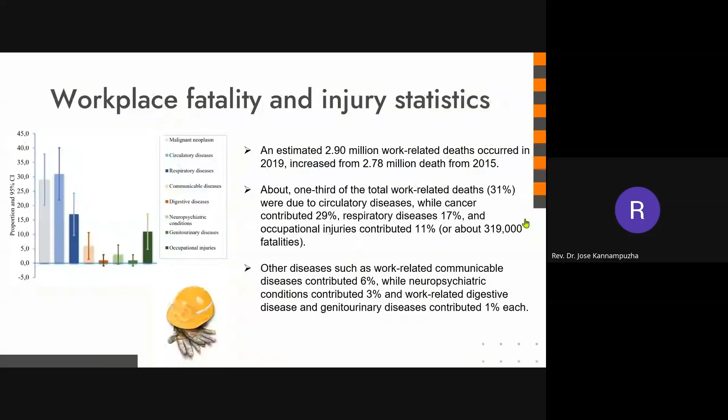Now there are other diseases such as work-related communicable diseases, which contributed 6%, and so on. Yeah, go to the next.

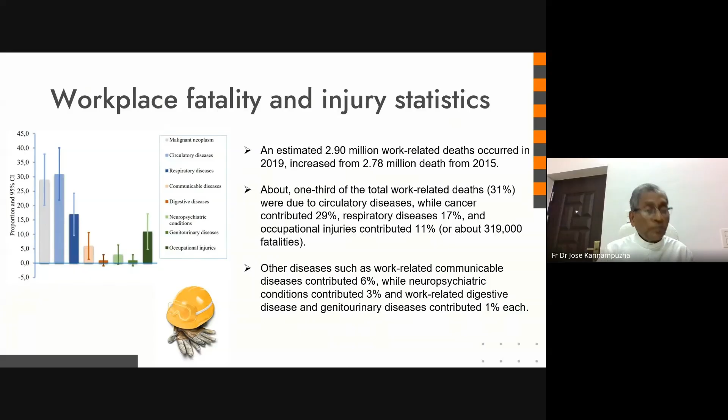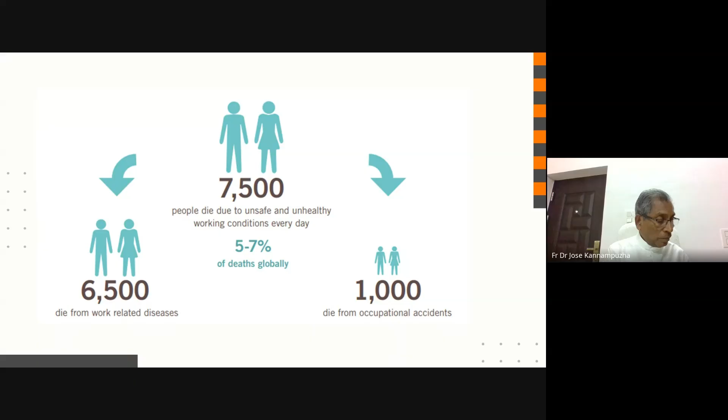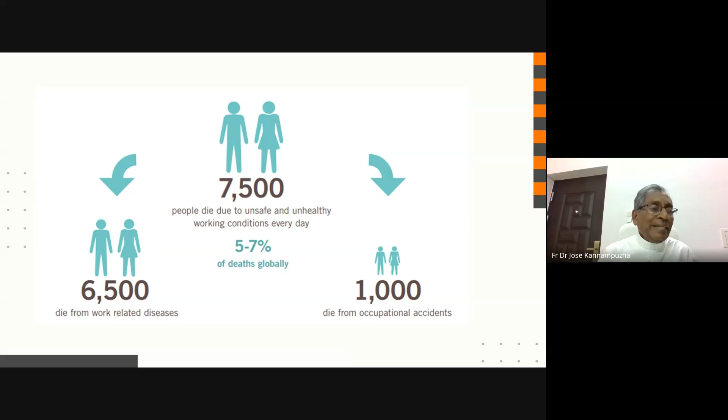Now, people die due to unsafe and unhealthy working conditions every day, and 5 to 7% is due to this, about 7,500 daily. This is daily statistics, and out of this, 6,500 die because of work-related diseases and 1,000 from occupational accidents.

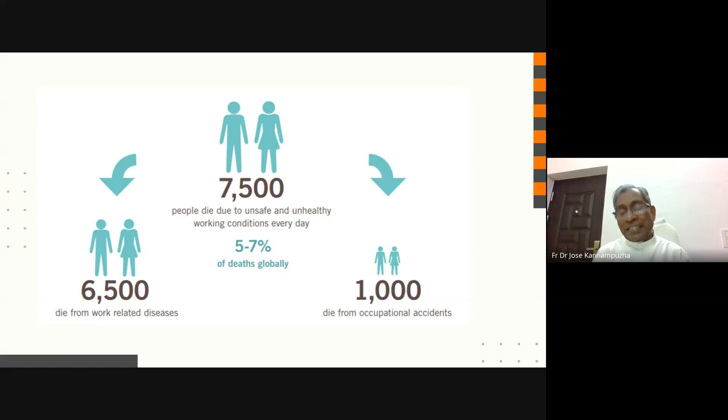Now, why is safety so important in engineering? Safety engineering is a discipline of applying engineering principles and practices to systematically identify, evaluate, and control hazards in order to reduce risk to acceptable levels, protect human life, and ensure safe operation of systems throughout their life cycle. This is very vital in our industry.

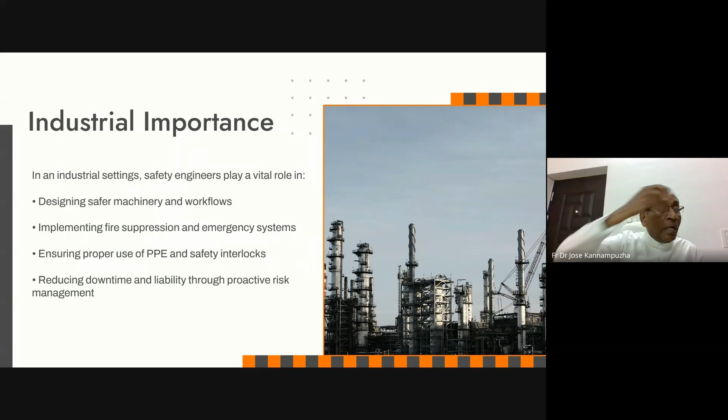Industrial importance: in industrial settings, safety engineers play a very vital role. We have to design safe machinery and safe workflow. If the machinery is not safe and the workflow is not properly handled, things will be in a very chaotic situation that should be avoided.

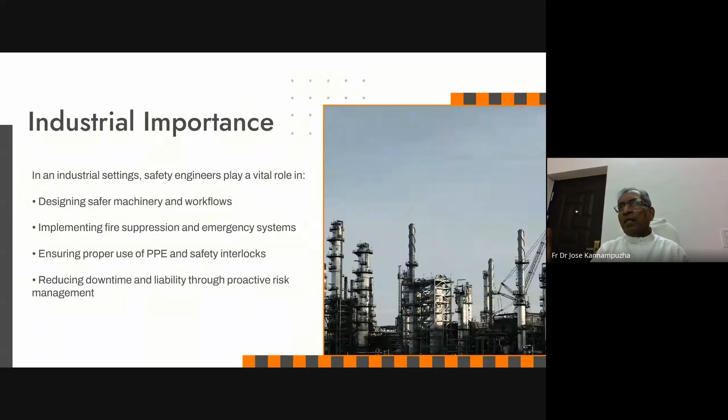We have to implement fire suppression and emergency systems, ensure proper use of PPE (personal protective equipment), safety interlocks, and reduce downtime. Because without this, human life is at risk, and not only that, the entire life cycle of the industry comes down, which is a big financial loss to the industrial owners. So we have to look into this aspect as well.

Now we are looking into 7-8 areas, which we will deal with one by one. The first one is why safety is central to engineering.

One aspect is human protection. Much more than anything in this world, human life is the most valuable. If you lose your life, whatever you gain is of no use - absolutely stupid to have something if life is not there. So we should prevent injury, fatality, and long-term health issues. That is why this is very central - human life is the number one value, without which whatever we have has no value at all.

Now, legal compliance also matters. There are a lot of complications if you are not adhering to the laws given by the government and related organizations. We will go into that in detail later.

Now, operational continuity: if an accident happens, there is downtime, and the industry may be closed. If it is closed for hours, it's a big loss; if for long days, it's an even bigger loss. So you have to reduce it, and only then can you profitably run the business. For this, you have to avoid every chance of accidents and ensure safety.

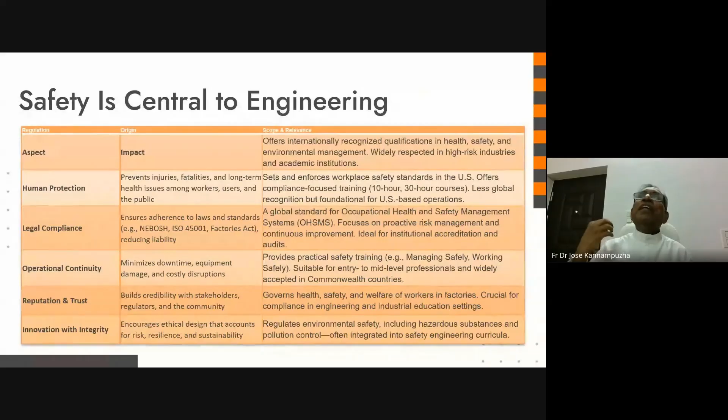Now we have to have integrity with innovation. Everything is new - we are going to Industry 4.0, 5.0. AI is coming into the picture, IoT is already very much in the air, and artificial intelligence is being incorporated into everything. We have to incorporate this into safety aspects too, to save our time, energy, and life.

Now, the second aspect is real world relevance - why this is important for the actual world.

Workplace hazards are a matter of real concern for us. We have to anticipate issues like electrical faults - this can happen not only in industry but even in domestic usage. And chemical exposure is very much a concern too.

You may remember the Bhopal issue - in the 1980s, so many people died, such a bad situation in the heart of India. Structural failures - roads failing, buildings falling - and ergonomic strain from sitting posture, workstation design, and working ambience are all very important.

Now, product liability is also very important. Poor design can lead to lawsuits, recalls, and reputational damage. Even the recent accident with the aircraft in Ahmedabad shows some issues coming up. This is not just for planes - even for smaller items this is very important. If you are using your mobile phone and it creates hazards, accidents, and fires, nobody will come to purchase your mobile any further. So product liability is a very important issue.

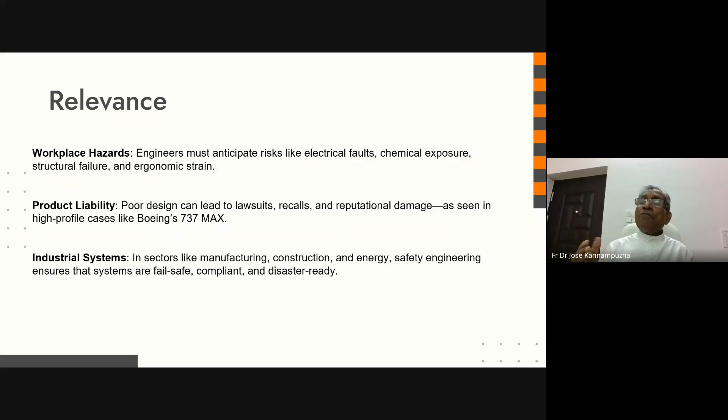And in sectors like manufacturing, construction, and energy, safety engineering ensures that systems are fail-safe - it should definitely be safe in all these environments.

Now, these are the core principles of safety engineering we are just going to look into.

The principles are these 3-4 items: hazard identification, risk assessment, preventive design, compliance and standards, and incident analysis. The first one, hazard identification, is detecting the potential source of danger in the system, processes, and environments. Identification is a very big issue. If we can't identify what the issue is, just like in the medical case, if you can't diagnose the real disease, how can you make a treatment? So you have to identify the problem. Then only we can go for the correction and other things.

Now, risk assessment: the likelihood and severity of these hazards must be analyzed. An assessment must be done.

Now, design is a very important thing. Once we come to know the reality, the problem, then we go for the preventive design, creating systems that minimize and eliminate risk through redundancy, fail-safes, and ergonomic design. Without design, there is no meaning in going for the reparation and other things.

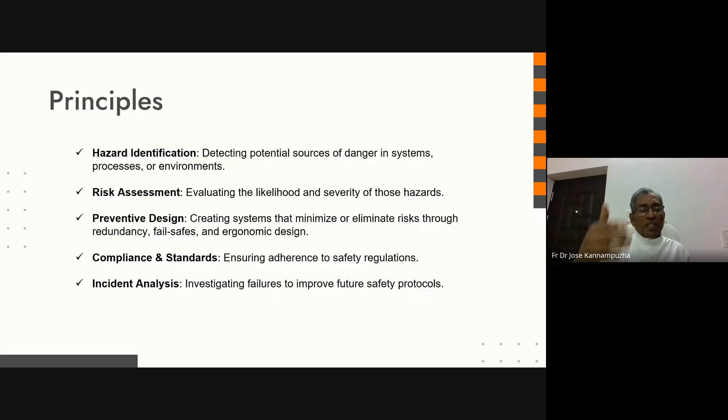Now, key techniques used in safety engineering. The first is FMEA, failure mode and effects analysis. The purpose is to identify the possible failure modes and their consequences, and this is used in product design, manufacturing, and process safety.

Now, the second technique is FTA, fault tree analysis. It maps out logical paths to system failure. If you know that logical path, we can definitely prevent it.

Next is HAZOP, hazard and operability study, which systematically reviews the process. This is especially applicable in the chemical industries, process industries, etc.

Another technique is STPA, system theoretic process analysis. It considers the control structures and unsafe interactions, and this is very useful for modern software-intensive systems.

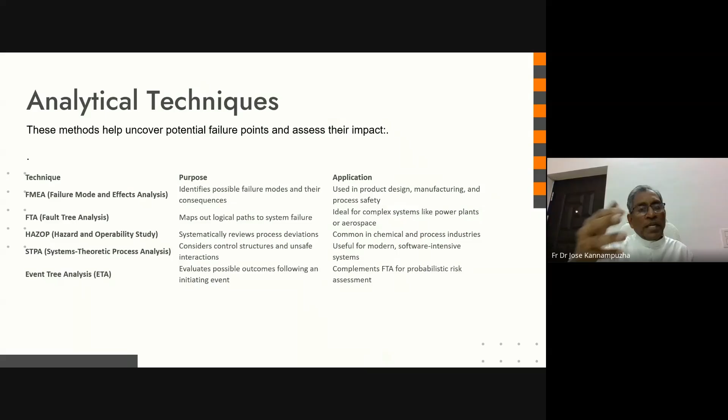Design and the techniques we already came across. Now, what are the preventive techniques?

Redundancy: adding backup components to ensure continued operations. This is very, very important. Even if one system fails, there should be a redundant system to support in the next case. If one leg is broken, there should be another leg to support. Even if there are failures in two or three systems, maybe a fourth system may be given so that safety is ensured. So this is the first one: keep redundancy.

Now, fail-safe design: ensuring systems default to a safe state during failure. Even if a failure happens, how can we, as a default, keep up the safety? This is another technique.

Now, there are interlocks and safety barriers, physical or logical mechanisms to prevent unsafe actions. So there should be some systems for this.

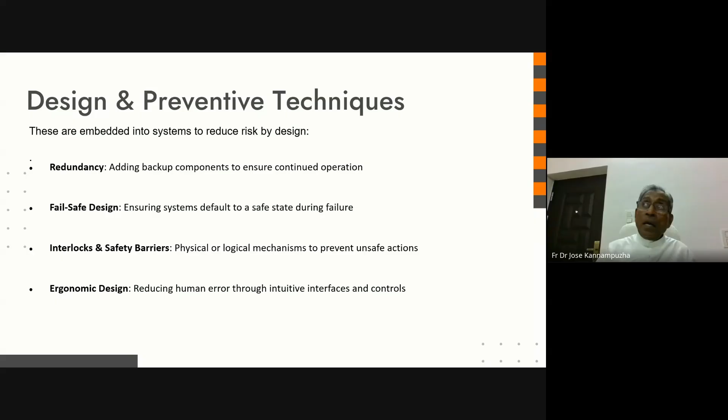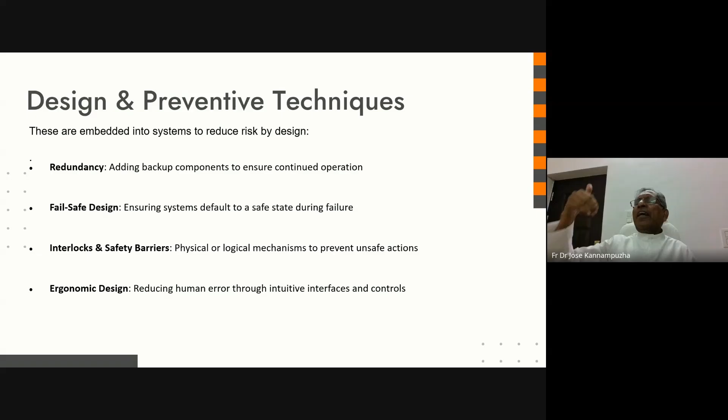Now, another is ergonomic design. Body fatigue has, in most cases, been a big reason for failures and hazardous situations. So the design must consider the seating posture, standing posture, or the posture in which a person is working, human fatigue, time, and everything. These designs must be properly and scientifically done and systematically implemented in the industries and elsewhere.

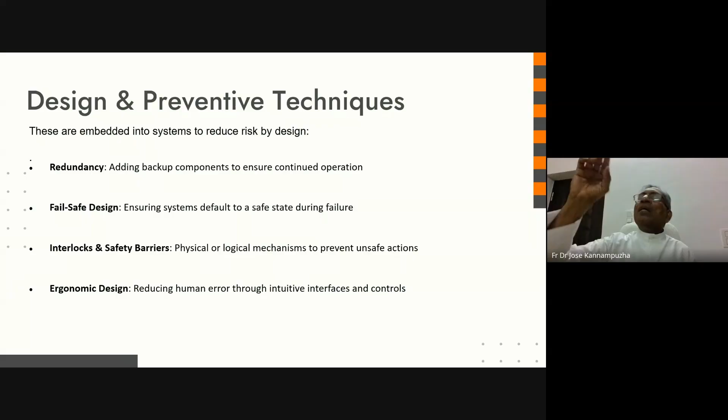Regulatory and procedural tools: now there should be safety audits and inspections, regular checks against standards like NEBOSH, OSHA, ISO 45001.

These are to be done on regular intervals. This must be done as a regulatory requirement, and this will definitely ensure the safety of individuals, systems, industries, and factories.

Job safety analysis, JSA, task level risk evaluation and mitigation. This also must be implemented properly.

So, permit to work systems. There should be an authorizing body, and they only will permit you for working in a hazardous task. Suppose you are implementing a lift in your building, maybe industry, maybe school, or educational institution—there should be an authority to check whether it functions properly, the electric connections are right, and it is working properly.

Otherwise, there can be innumerable accidents, and every day we are listening about such accidents. This is for the case of the lift alone, but in every other system also this is really true. So we have to look into the permits for this.

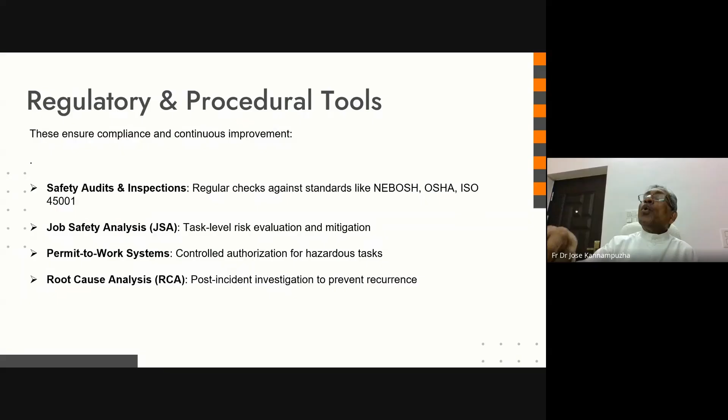Now, root cause analysis. After the incident, an investigation must go forward to prevent such things from happening again and again. This is like the example of the Ahmedabad plane crash I told you. Now they are making studies. Final results are not yet announced.

So if something wrong has happened, it may be human errors, mechanical errors, or some other errors. Those things must be eliminated hereafter. Only then will people be safe to fly in aircraft. So this root cause analysis is also very important.

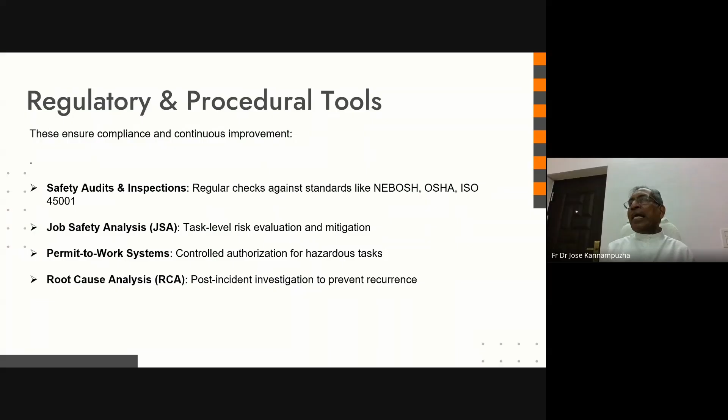Now, the fifth factor is the fundamentals of safety, the core pillars. We are going to go through that. The fundamentals are these: hazard identification. This has already been mentioned, but once again it is brought to your analysis and discussion.

Recognizing the potential sources of danger in systems, environments, or tasks. You have to identify. You have to diagnose.

As in the case of a disease, a doctor first looks into the diagnosis part. Only the doctors who can diagnose properly can give medication in the right way. Otherwise, it is simply in vain. You cannot just fire a gun panning all directions—that is not the way it should be done. It should be correctly aimed and pointed at the exact point, for which diagnosis is very important.

That is what we are saying about hazard identification, so that must be done. And then risk assessment must be done, evaluating the likelihood and impact of the hazards. So whether there is any probability of a hazard happening, we have to analyze, and what will be the impact if the hazard has happened. This must be a very thorough exercise, the risk assessment.

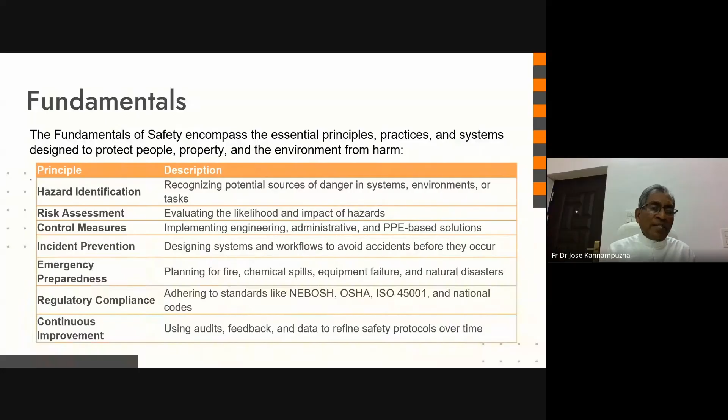Now there are layers of protection. This should be taught in safety engineering; in the classes it must be given.

Nowadays, AICTE is insisting that in polytechnics as well as in degree engineering, this safety engineering is a very important item that must be taught everywhere. Especially I understand in St. Mary's Polytechnic, there is also a branch in fire and safety. It's a very good thing.

Even though fire and safety is not there in other polytechnics and engineering colleges, for other branches also, safety engineering must be taught as part of the curriculum. So the primary protection process control systems that detect and manage hazards must be given to everyone, especially those connected with industry, whether polytechnic students or engineering graduates going to work in industry.

Some of them will be in manufacturing industry, real factories, and some in the service industry as well. But in service industry also, there are a lot of occasions where safety hazards may emerge. So we have to look into that as well. This primary protection must be implemented and given to students at every level.

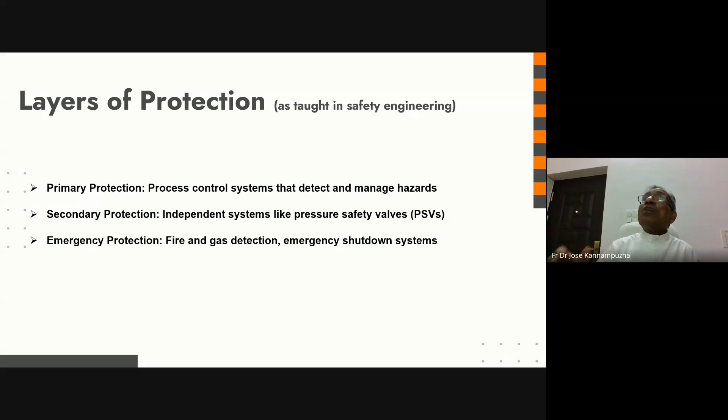Now, secondary protection, independent systems like pressure safety valves, must also be given. In industries and other institutions, safety measures must be given. You see, in the pressure safety valve, even in the pressure cooker, we have seen a safety valve. If it bursts, first the valve will open so that the entire system will be made safe. This must be done in the community as well, in industries, in the public, everywhere.

The second level of implementation of safety measures must be implemented. Now, emergency protection, fire and gas detection, emergency shutdown systems, this must be done everywhere.

Fire and safety is a very important thing. Even in construction of new buildings, the fire department is insisting that measures must be well implemented. The fire engine must be able to move around the building, and there must be safe tanks and other things for keeping water enough to pump when a fire breaks out, and other emergency shutdowns also.

While we were having the floods in Kerala in 2018, we were not prepared for that flood. Most of the dams, their openings, their spillways, were not functioning properly. They could not operate because frequently they were not opened and shut down. No grease was applied to the machines and gears, and they could not open at the last moment, so everything broke up.

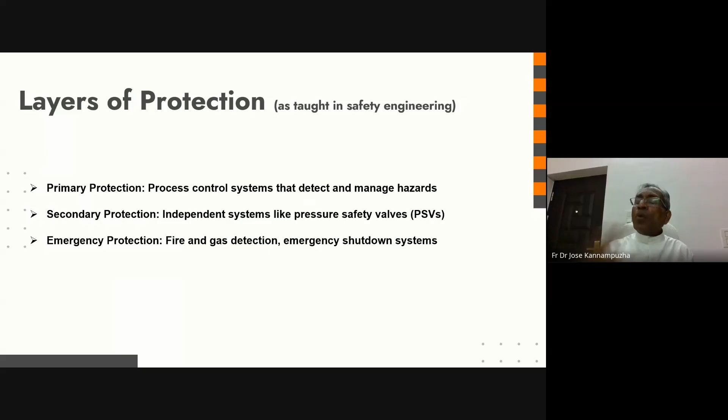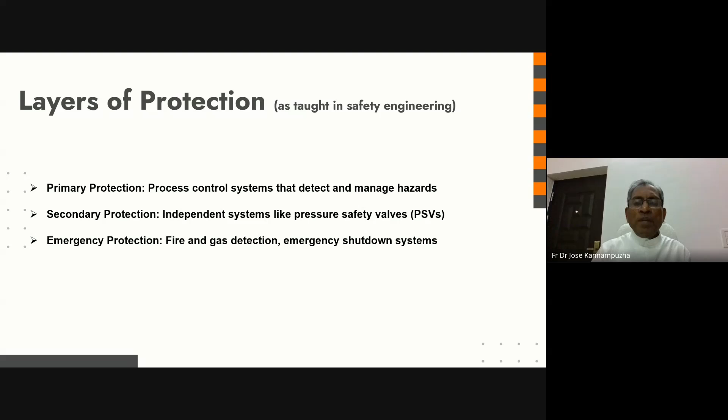A massive flood came to Kerala rivers, and finally we know what a calamity we had in 2018. So this should not happen. Emergency protection systems must be there. So the primary protection, secondary and emergency protection, we should be prepared, not only in industry but everywhere, in the community, in society, everywhere people move around, work and live, even in houses. These layers of protection must be implemented in the proper way.

We are mourning about our cleanliness. Swachh Bharat is one of the issues the central government is taking up, but just go around, on the roadsides, piles of waste are accumulated. Why is this happening? People are not educated. This is not happening in developed countries, in Western countries. Why? From the nursery classes, this is taught. They know how to segregate waste, plastic, digestible, degradable, metallic things, and other things they segregate. They learn this from the nursery classes.

You go to Japan, Germany, or any Western country, the children do that. Whereas even a PhD man traveling in a car on Indian roads, after eating something, cleans their hands with a tissue paper and throws the tissue paper through the window. Somebody chews a sweet and the wrapper is simply thrown to the roadside. This is done by educated people also in India, because this lesson has not been taught at a lower level.

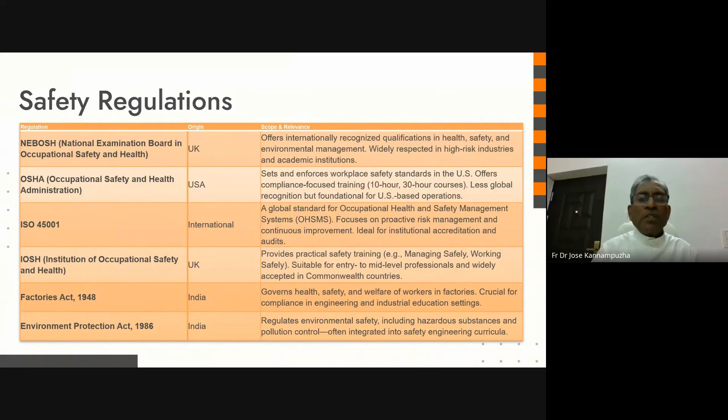Okay, I'll go to the next. Now we are going to the 7th and finally 8th. We are almost coming to the end. Now the educational and institutional significance of this safety.

So it must be incorporated into our educational system, as I mentioned about the incorporation of the same from the nursery schools. Definitely it should start with nursery classes. Even if that is not taken care of in engineering academic career, especially in polytechnics, ITIs, and very especially in graduate engineering levels, this must be well incorporated. So AICTE, as I mentioned earlier, is insisting on that. In the curriculum, there is a safety chapter, one subject has been allotted to that. So this must be taught.

Now, for anything and everything, we are connecting things into artificial intelligence. Even in camera, artificial intelligence is there. Even in your WhatsApp, artificial intelligence is there. Even for writing an essay, there is artificial intelligence. Even for scientific study, there is artificial intelligence. It is not only ChatGPT, there are a lot of other things.

Meta is bringing something. Gemini is there. DeepSeek is there. Perplexity is there. Claude is there. Everywhere things are happening. And depending on the nature of the work we are undertaking, we can go to any one of these.

Nowadays, in the general public, there is a kind of talk that ChatGPT may not be the fitting tool for you. Maybe Claude may be better, maybe Perplexity is a better tool, Gemini may be another one. Looking into the different aspects, we are selecting these things.

Now here also, in hazard and safety measures, AI is coming into the picture. So the first one is AI predictive analytics. AI-powered systems can forecast potential incidents by analyzing patterns in historical real-time data. The accidents and hazards that have happened—fire hazard or many other hazards, chemical hazards—so many things, you can enumerate them and look into, and explain the historical background also.

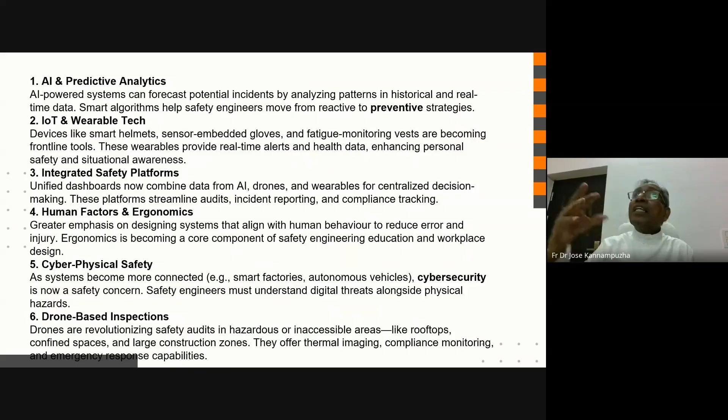Now, sensor embedded gloves, when you are catching something very, very dangerous, maybe a live wire, the sensor embedded gloves will give you a warning and you can take precautions.

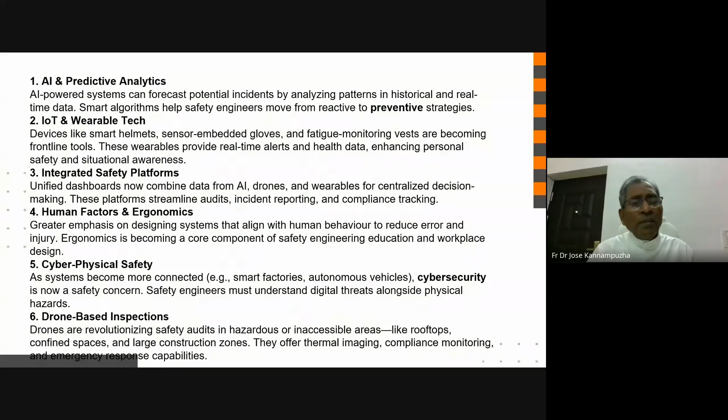Now, fatigue monitoring vests. As I mentioned earlier, fatigue is one of the reasons for many accidents. Why aircraft accidents are happening, people say one of the reasons is the fatigue of the captain. They are given duty 24 hours at a stretch and they are getting tired. Now, something must be done. Even the drivers in trucks are driving for 2 days, 3 days consecutively without any sleep. Now the fatigue is another thing.

So that is to be monitored, and the vehicle must be given such systems wherein the drivers or the captain, whoever, is given a rest for a while so that their driving will be safe. Now some vests must be given. These vests will give monitoring systems and become the frontline tools.

These are some of the trends. These wearables provide real-time alerts and health data. So we have to take care of enhancing personal safety and situational awareness. Safety is given, also awareness. Both are important. Once you come to awareness, definitely you will think about safety and then measures will be undertaken. Now, integrated safety platforms.

Unified dashboards now combine data from AI, drones, wearables for centralized decision making. A combination of all this, what we mentioned earlier, it may be AI, drones are very popular now, becoming more and more popular, everywhere it is there. Now wearables, which I just mentioned, and all these things will come together, and the centralized decision making will help the entire decision making process.

These platforms streamline audits and incident reporting and compliance tracking. This will definitely help us very much. So this is another trend where we can think about and go for implementation wherein hazards can be eliminated.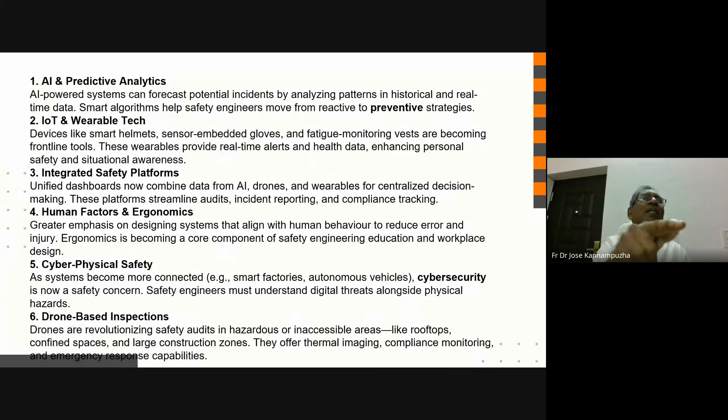Now, because of cyber security issues, they could leak some things. They could identify the opponent, the enemy, their places. They could creep into any situation. This is to be implemented in industrial safety also.

Say you take a biscuit manufacturing industry, for example. Now they've got their recipe already secured in their computer system. According to the directions given by the computer, according to the recipe already put into the computer, their combinations of materials go to the factory and are properly mixed, cooked, and processed, and finally the biscuit comes out.

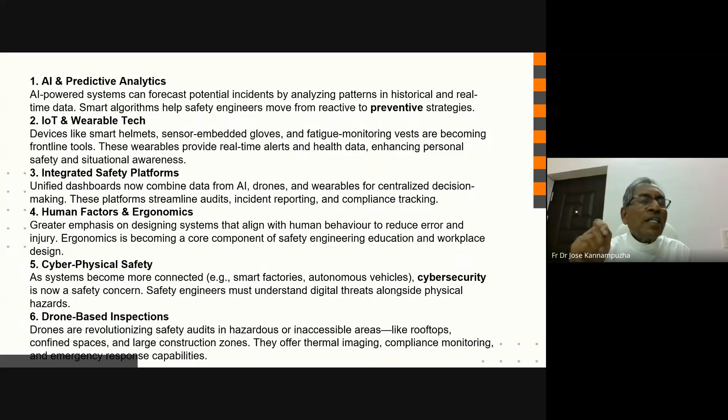Now somebody is stealing your recipe, breaking your cyber world, and thereafter the factory is on standstill, stagnant. Nothing more is workable. Maybe the next day, the top manager gets a telephone call from a group of people that your recipe has been hacked, and if you give me a ransom of, say, 5 crore, only then we will put it back. This can be a situation.

And finally, they have to bend their knee, bend their head before these people and pay 5 crore to get it resolved. The thing is, one day they are producing a lot of products which may cost very high, maybe 20 lakhs, 20 crores or 50 crores. So one day's loss is much more than this 5 crore. So they have to surrender, they have to submit. And then this is why cyber security is important.

This is not only in industry, everywhere. Your cash can be taken away from the banks by cyber hacking. Your formula can be taken away. Your intellectual property can be taken away. So cyber security is very, very important. So the physical systems as well as the cyber systems, you have to take care of.

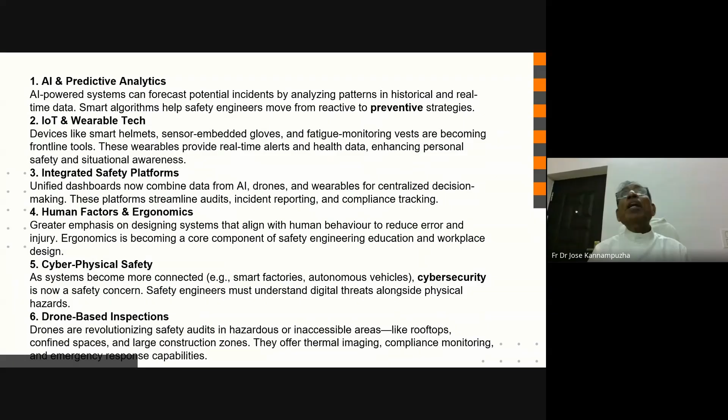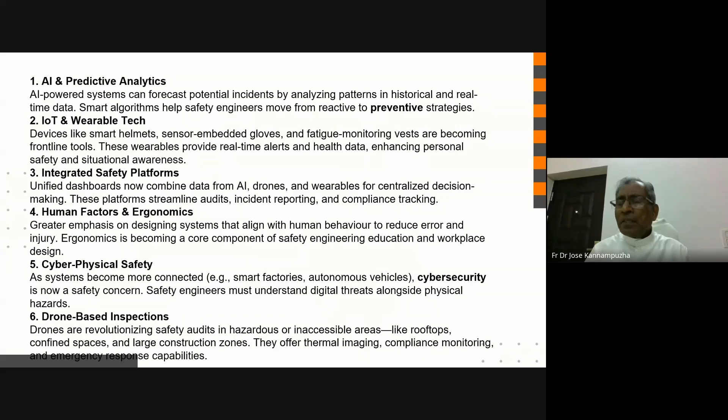And then it can be done - inspections can be drone based, especially in war areas, hazardous areas. This can be a very important tool. Humanly, we may not be able to go there. In the war fronts, now you see the drones are sent. In our border with Pakistan, we understand from the media that they are sending drones, and everywhere this is happening. In every war, even the Ukraine-Russia war, we read about this. They are sending drones with bombs and other lethal weapons. They can attack the enemy in any way.

So this is another area, this is a latest development. We have to think about that also. I'm just bringing all these things to your introspection, your discussion, your networking, so many things.

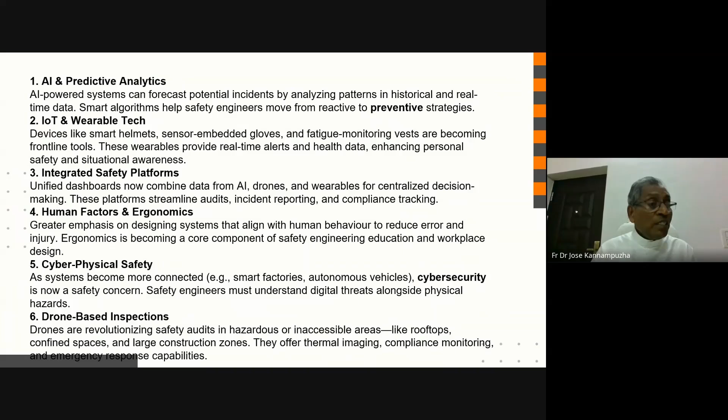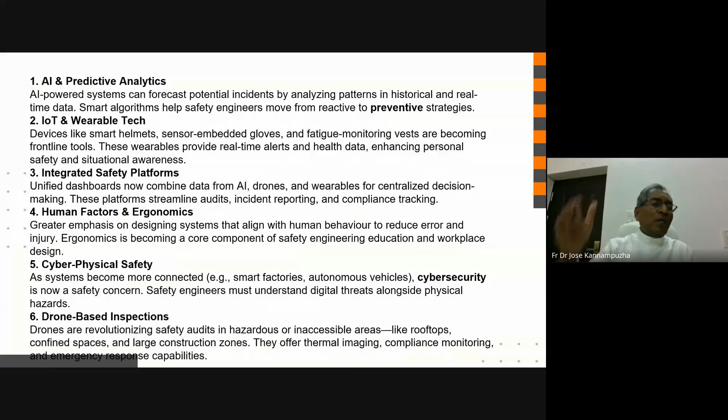So this is revolutionizing the safety audits in hazardous and inaccessible areas. It can be there in rooftops, confined spaces, large construction zones, where humanly we may not be able to go there. We cannot inspect everything. It's a huge building, maybe some 50-story building - how can we go and inspect it physically? Whereas a drone can do it in a very easy and faster mode. So these are some of the things, the probability or scope of our development in hazard stopping or eliminating systems. So this also is important.

Okay, now next we go to the last one. Yes, with this, I just conclude the first session. If you have got any questions, we can perhaps put it across.